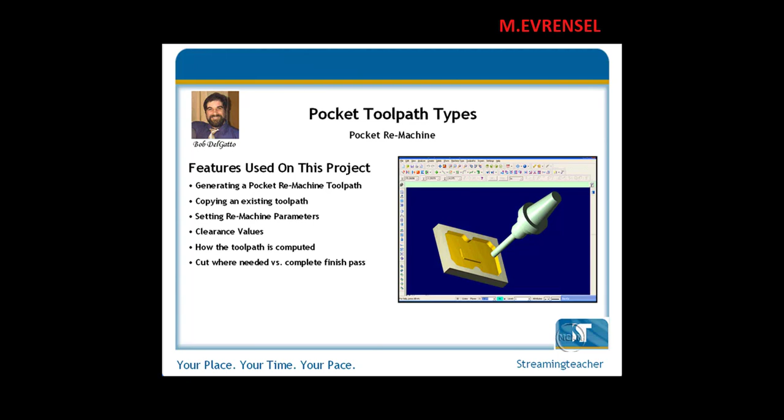The next pocket type we're going to look at is called pocket remachining. I'm going to use the same file from the previous video on pocket island facing. If we take a closer look and analyze the radius, you'll see this corner is a 0.125 radius, which means the smallest tool that can get in and actually cut this detail out is going to be 1/4 of an inch.

Well, I used a 1/2 inch diameter end mill in this previous toolpath.

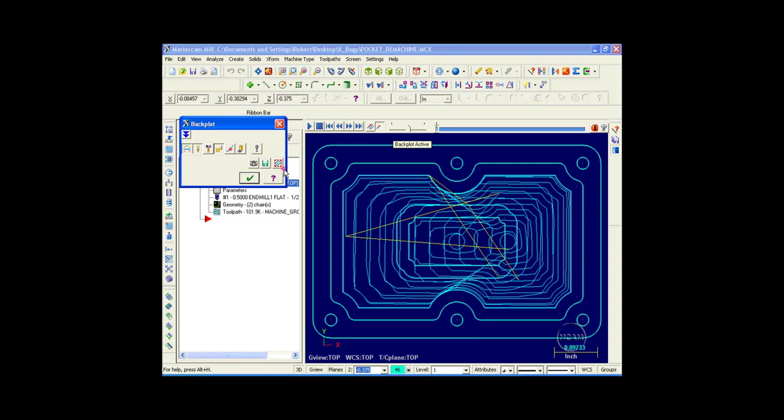So let's take a look at this from the top view. I'm going to go into Backplot and select Quick Verify. If I come in here, you can see there's going to be material left behind right in this corner. So I don't want to go back in with a smaller end mill and clean out the whole area and repocket all of it.

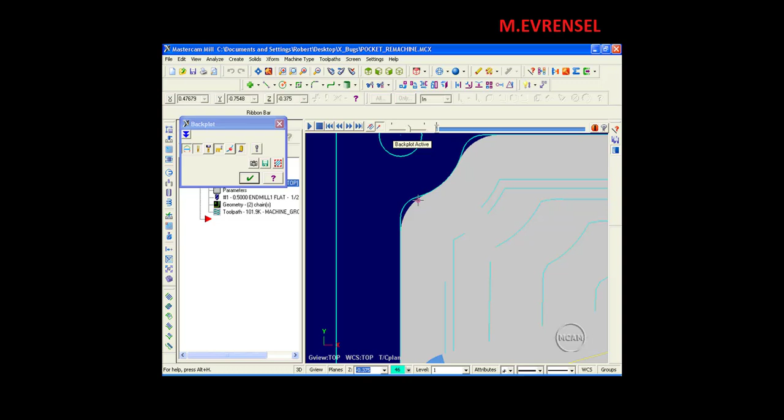What I'd like to do is selectively go in and just pick out the areas that I need to. That's where pocket remachining comes in.

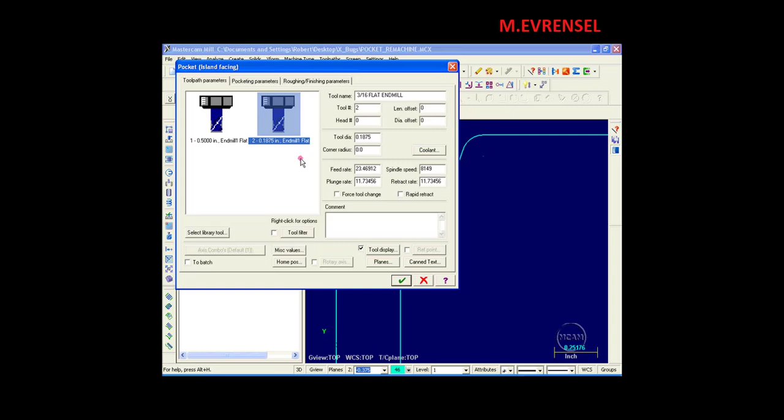So what I'm going to do is take this toolpath. I'm not even going to create a new toolpath. I'm going to right-click on this, drag it down, release it, copy after, go into my parameters, go to my toolpath parameters page, and select a 0.1875 end mill.

So now I'm using a cutter that's a little bit smaller than the radius, so I have a little bit of elbow room. Go to my pocketing parameters page, go to the drop-down menu, and select remachining for the pocket type. Once selected, the remachining button becomes active. Now I can compute the remaining stock to machine from all previous operations, the previous operation, or by specifying a roughing tool diameter. Well, I have one operation in front, so I'm using that.

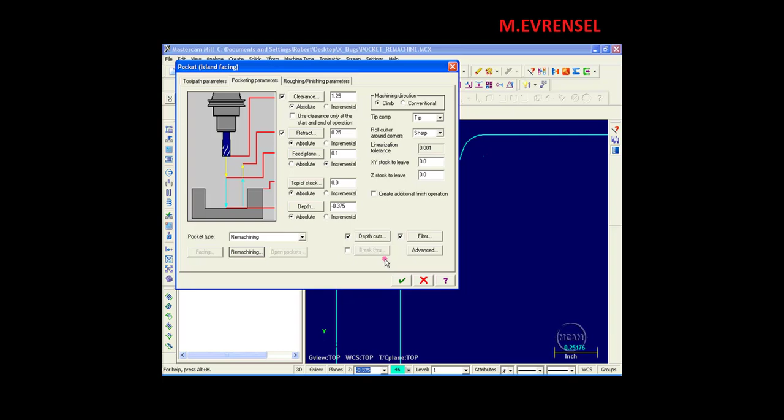I can specify a clearance. The value here will extend my contour beyond just the radius that needs to be cleaned out. The reason being, with the material left behind by the 1/2 inch diameter end mill, if I come in and just pick it out with a smaller end mill, it leaves a little bit of a cusp. By extending this contour it'll make sure that gets cleaned out, so any mismatch in the radius of the two tools cutting this won't leave behind any uncut material.

Click back out of this, go into my parameters, select remachining. I'm going to put in a value of 0 for the moment.

Apply entry-exit curves to rough passes — this will give you entry and exit moves if you're using the roughing portion of the toolpath. Machine complete finish pass — this will machine completely around the profile rather than just cleaning out the corners. Right now I'm not going to do that; I just want to go in and pick the corners out.

Display stock — this will show you how it is computing the toolpath. I'm going to leave this displayed so you can see what's going on, then after that I'm going to turn it off.

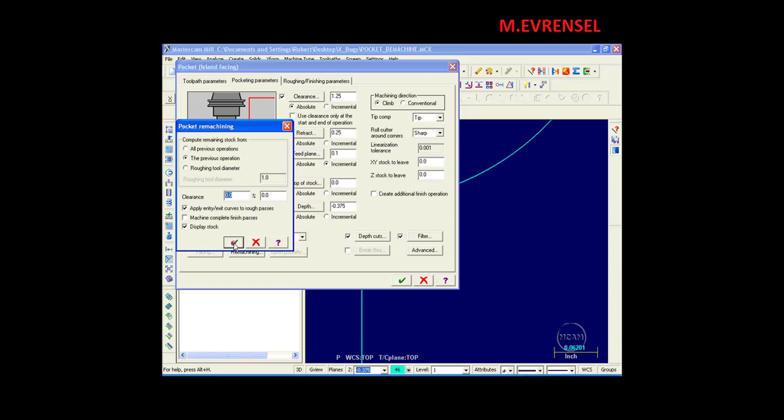I'm going to click OK, turn off my depth cuts, turn off my filter, come over to my roughing finishing parameters. I'm going to uncheck roughing, leave my finishing pass selected, and give it a lead in, lead out, with a perpendicular entry, length of maybe 50%, no arc radius — so just a straight line into my finishing pass.

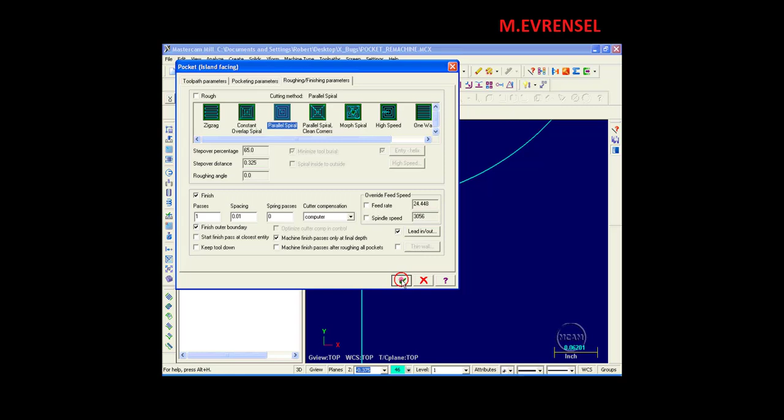Click OK. I'll accept this, and I'm going to regenerate.

Okay, what we're looking at on the screen, this is the machinable area for the roughing tool. Press Enter. This is the machinable area for the finishing tool. Press Enter once again. What remains is what's unique only to the finishing tool. Press Enter and Enter again.

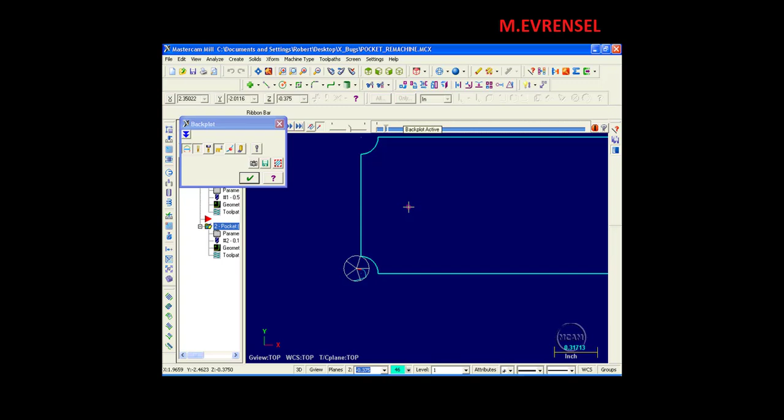Go into Backplot. I'll turn off Quick Verify and show you what's happening. My tool comes in, leads in, and sweeps out the corner. Comes over here, and then just picks out the corner. Comes over. Now this didn't cut through this boss. There was a retract in Z. We're looking straight down on this so you're not seeing it.

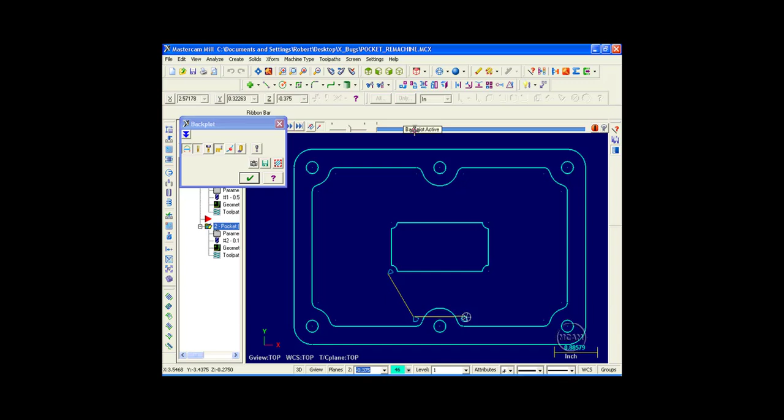It lifted up, over, now it's dropping down, and it's coming in and cleaning this out. And it continues. And it comes in and keeps picking out all of the areas that the 1/2 inch end mill couldn't get in.

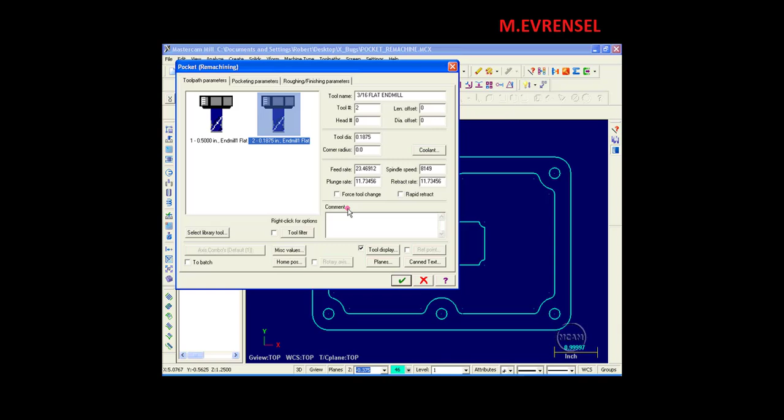Now let's go back to our parameters. I'm going to return to the remachining dialog box, and we'll take a look at what effect clearance values have on your toolpath. I'm going to increase this to 30%. Accept it, regenerate. Now, again, it's showing the machinable area for the roughing tool, the finishing tool, what's unique to the finishing tool, and it computes it.

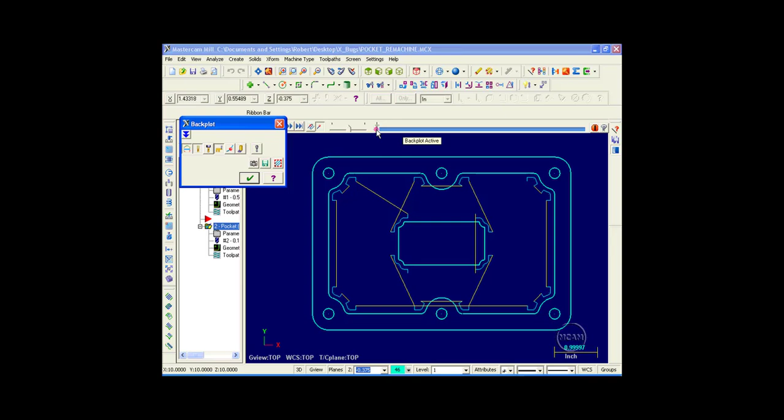Go back into backplot. Now you're going to see how this is extended. Comes through, cleans it out, comes along in here, and sweeps out. So now you can see how the toolpath has been extended along the contour that needs to be cleaned out. So if there was any little bit of a cusp left in here, it can clean it out.

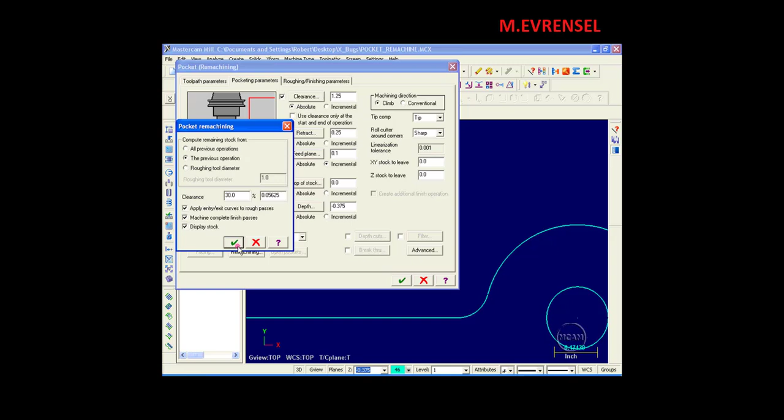Go back into my parameters, remachining. Now I'm going to check Machine Complete Finish Pass, and I'm going to turn off Display Stock. I'll click OK. Say OK. Now when I regenerate it, it just regenerates the toolpath. Now when we backplot this, our tool comes down, and it leads in, and it takes a full finished contour around the perimeter, comes over, and takes a full finished contour around the island.

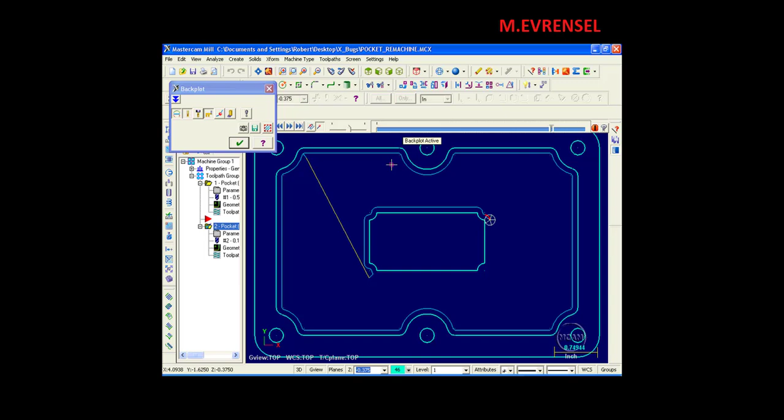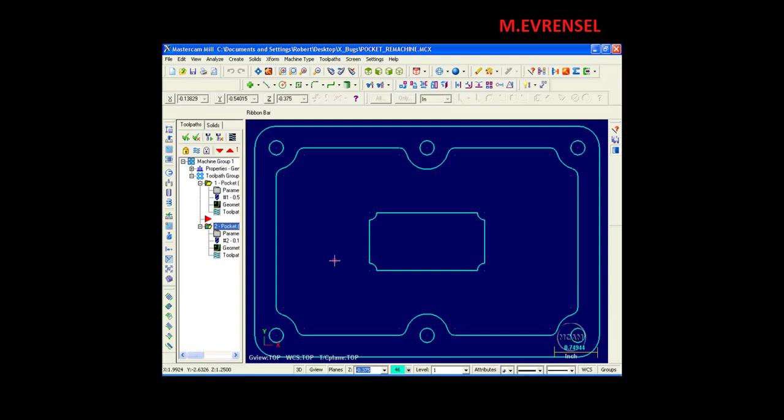Now this could be used in conjunction with depth cuts. It could be used in conjunction with roughing it out first, then finishing it. This could be a very convenient toolpath when you want to rough out a pocket with a larger end mill, then come right back in and clean out the corners with a smaller diameter end mill without having to recreate a whole new toolpath and repick geometry.

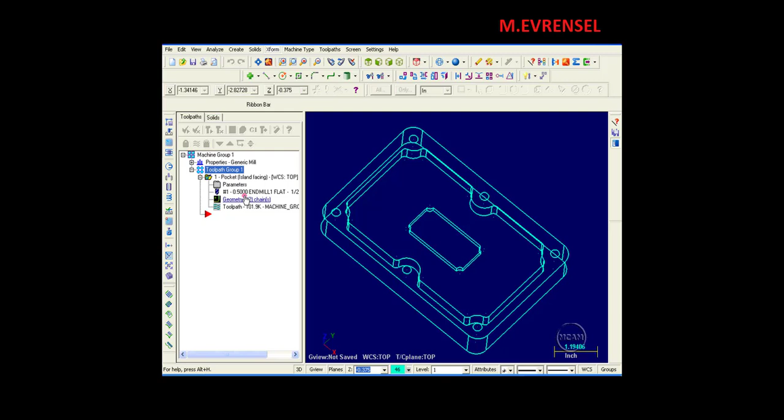The next pocket type that we're going to take a look at is called pocket remachining. Now I'm going to use the same file that I used in the previous video for pocket island facing. If we take a closer look at this and I analyze my radius, you'll see that this corner is a .125 radius, which means that the smallest tool that can get in here and actually cut this detail out is going to be 1/4 of an inch. Well, I used a 1/2 inch diameter end mill in this previous toolpath.

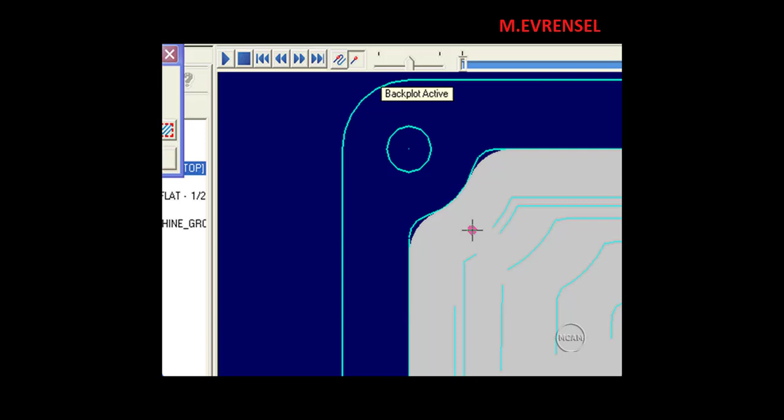So let's take a look at this from the top view. I'm going to go into backplot, and I'm going to select Quick Verify. If I come in here, you can see that there is going to be material left behind right in this corner. So I don't want to go back in with a smaller end mill and clean out this whole area and repocket all of it. But what I would like to do is to selectively go in and just pick out the areas that I need to. That's where pocket remachining comes in.

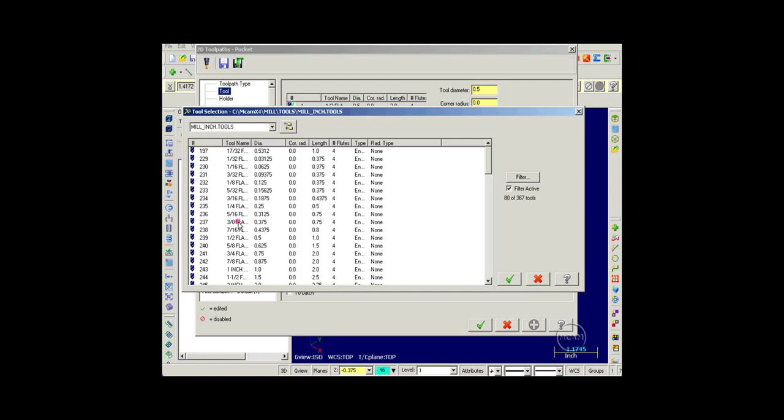So what I'm going to do is I'm going to take this toolpath. I'm not even going to go into creating a new toolpath. I'm going to right-click on this, drag it down, release it, copy after, go into my parameters, go to my tool library. I'm going to select a .1875 end mill. So now I'm using a cutter that's a little bit smaller than the radius, so I have a little bit of elbow room. I'm going to go to the Cut Parameters page, go to the drop-down, and select Remachining as my pocket type.

Now I can compute the remaining stock to machine from the previous operation, or by specifying a roughing tool diameter. I have one operation in front, so I'm using that, and this is what I'm going to toggle.

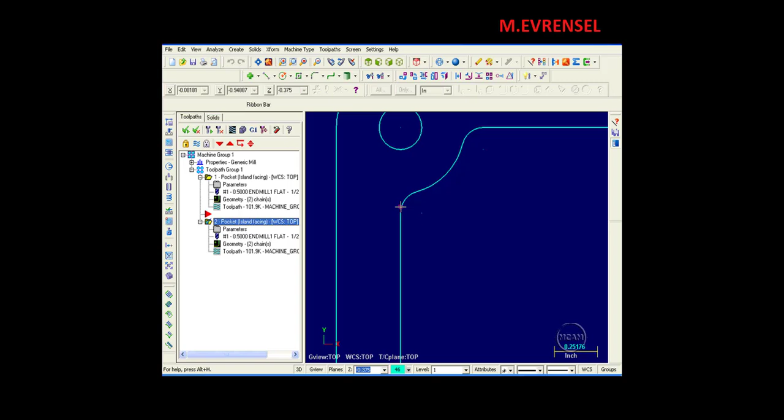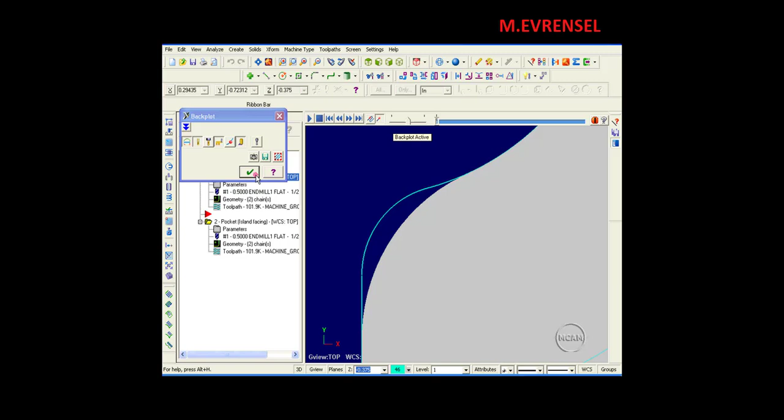I can specify a clearance value, which will extend my contour beyond just the radius that needs to be cleaned out. With the material left behind by the half-inch diameter end mill, if I come in with a smaller end mill it leaves a cusp. By extending this contour, it'll make sure that gets cleaned out, so any mismatch in the radius of the two tools won't leave behind uncut material. Click back out of this and go into my parameters.

I'm going to put in a value of 0 for the moment. Apply entry-exit curves to rough passes - this gives you entry and exit moves if you're using the roughing portion of the toolpath. Machine Complete Finish Pass will machine completely around the profile rather than just cleaning out the corners. Right now I'm not going to do that - I just want to go in and pick the corners out.

Display Stock will show you how it is computing the toolpath. I'm going to leave this displayed so you can see what's going on, then after that I'm going to turn it off. I'm also going to turn off my depth cuts and turn off my filter.

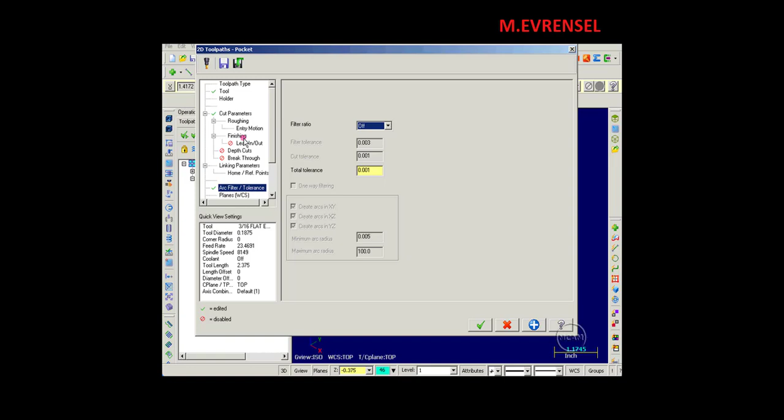I'm going to uncheck roughing and leave my finishing pass selected. I'll give it a lead in, lead out, with a length of maybe 50%, no arc radius - so just a straight line into my finishing pass. I'll accept this and regenerate.

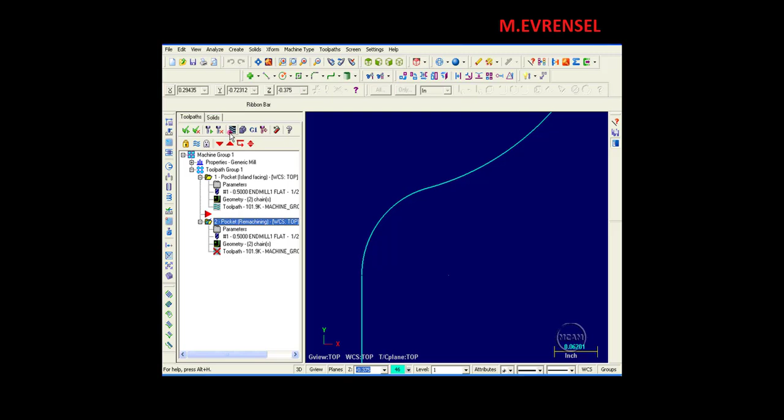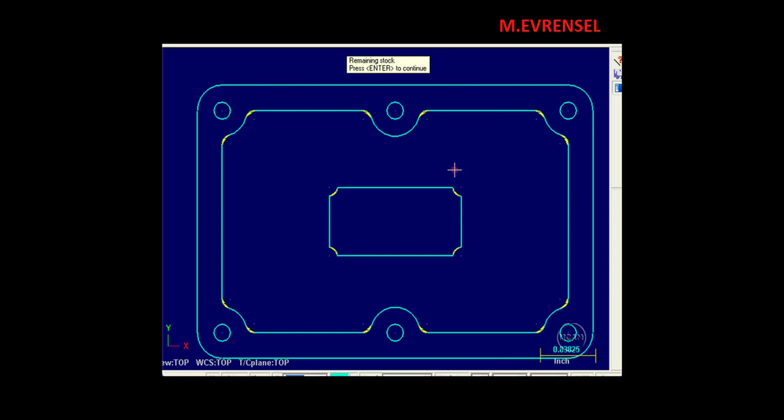Okay, what we're looking at on the screen - this is the machinable area for the roughing tool. Press Enter - this is the machinable area for the finishing tool. Press Enter once again - what remains is what's unique only to the finishing tool. Press Enter and Enter again.

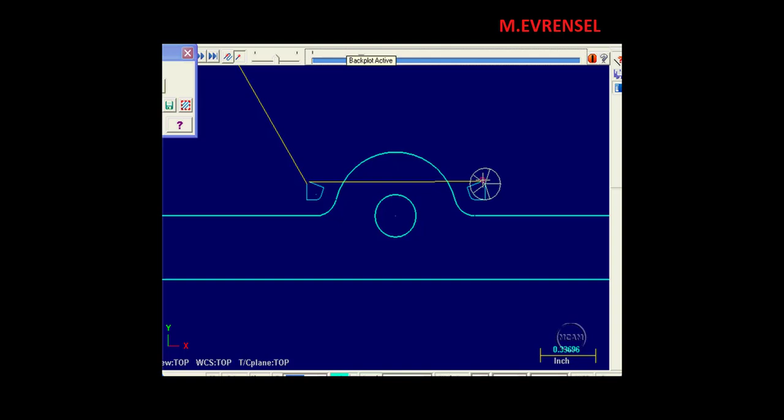Go into Backplot - I'll turn off Quick Verify and show you what's happening. My tool comes in, leads in, and sweeps out the corner. Comes over here and picks out the corner again. Now this didn't cut through this boss - there was a retract in Z, and we're looking straight down so you're not seeing it. It lifted up, over, now it's dropping down and coming in to clean this out, and it continues, picking out all the areas that the half-inch end mill couldn't get into.

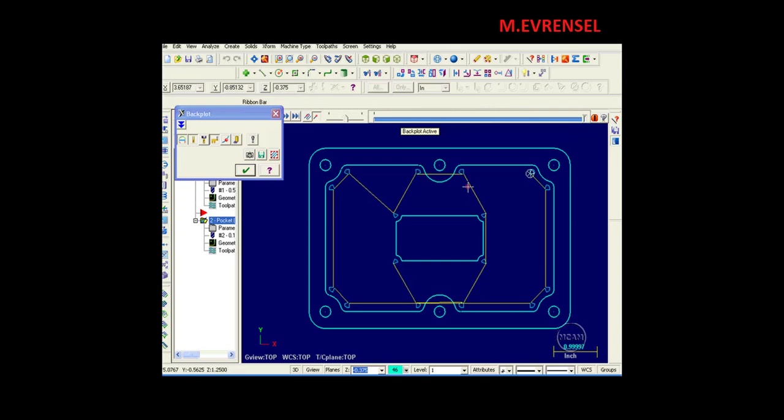Now let's go back to our parameters and take a look at what effect clearance values have on your toolpath. I'm going to increase this to 30%, accept it, and regenerate. Again it's showing the machinable area for the roughing tool, the finishing tool, what's unique to the finishing tool, and it computes it.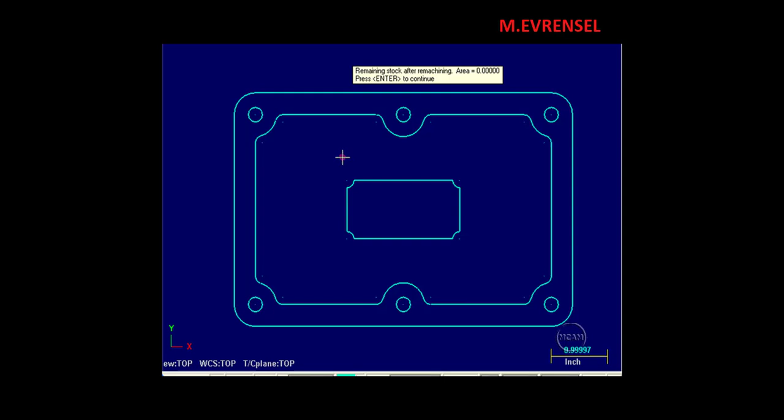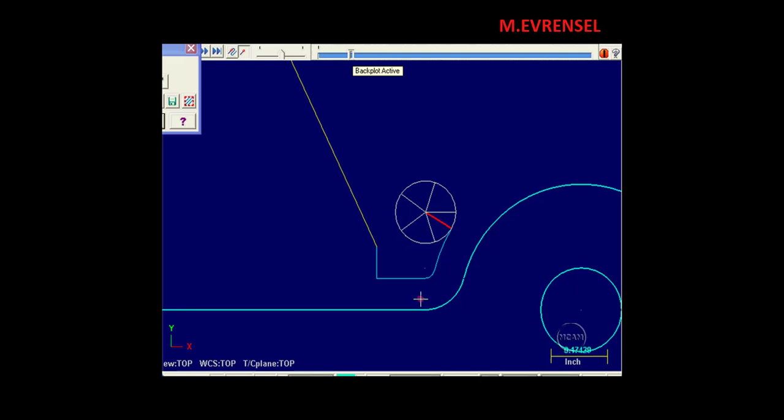Go back into Backplot. Now you're going to see how this is extended - comes through, cleans it out, comes along in here, and sweeps out. So now you can see how the toolpath has been extended along the contour that needs to be cleaned out, so if there was any cusp left in here, it can clean it out.

Go back into my parameters, remachining. Now I'm going to check Machine Complete Finish Pass, and I'm going to turn off Display Stock. I'll click OK. Now when I regenerate it, it just regenerates the toolpath.

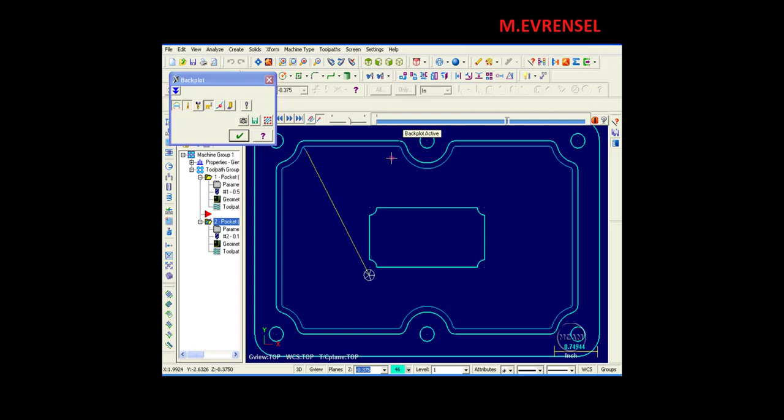Now when we backplot this, our tool comes down and leads in, taking a full finished contour around the perimeter, comes over, and takes a full finished contour around the island.

Now this could be used in conjunction with depth cuts, or in conjunction with roughing it out first and then finishing it. This could be a very convenient toolpath when you want to rough out a pocket with a larger end mill and come right back in to clean out the corners with a smaller diameter end mill, without having to recreate a whole new toolpath and repick geometry.